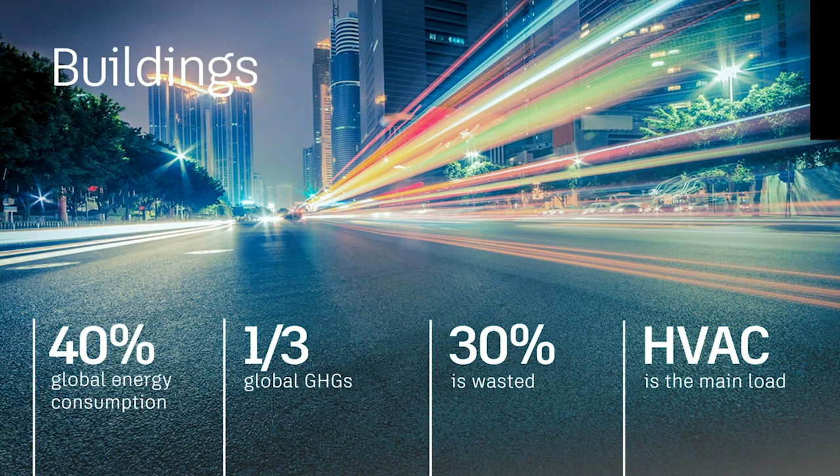overcome. For anyone who was at Autodesk University last year, our CEO, Andrew Anagnost, got up on stage and made sustainability fundamental to the core vision of Autodesk. We understand there's an inevitability of more. There's going to be more people, more products, more goods. At Autodesk, we want to enable designers and people who make things. It doesn't even have to be buildings. It could be a television or a product or something that you have in your house. We want to make that better by using less resources.

And when we start to think about our buildings, we want to look at massing. We want to look at the building form. We want to look at how it's oriented, how the sun plays on it, and the materials it's built from. And then the climate considerations. Where in the world are you building? How are things moving forward?

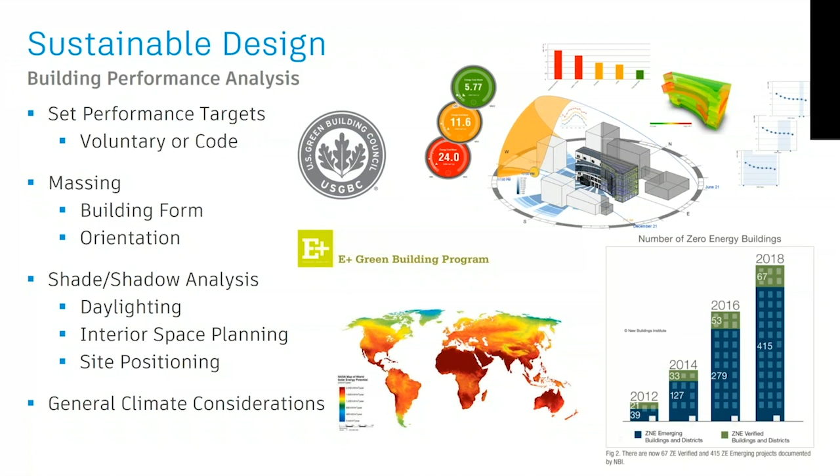With Autodesk Insight, it's a tool that allows you to take care of climate. So you can look at how the climate's affecting the building energy. You can look at your heating and cooling demands, and also solar and daylighting. If you want to move to some of the other things that are thought of as very important in building performance analysis, you can look at the Revit MEP tools and computational fluid dynamics, and then other plugins that go into Revit, such as Tally, which was developed by an architecture firm, KieranTimberlake, which allows you to do a life cycle cost analysis.

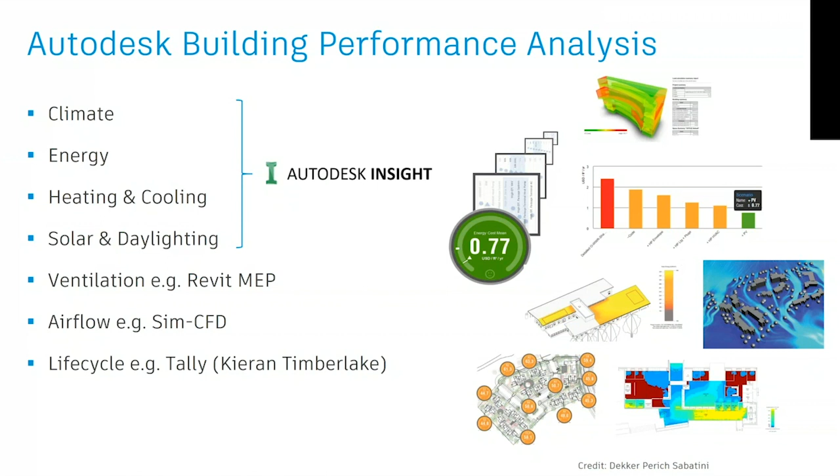So let's talk about one thing, and this came out Monday, I think Monday, September 11th, and it's hot off the press. I think this is really important, since this is an AIA certified webinar, to talk about some things that they just put in. They adopted new rules and ethical standards for members. And the three things that they added in were equity in the profession, sexual harassment, and sustainability. While not in the umbrella of this webinar, equity and sexual harassment are very key important topics, as we all know. But I really want to dive into some of the things they put in sustainability.

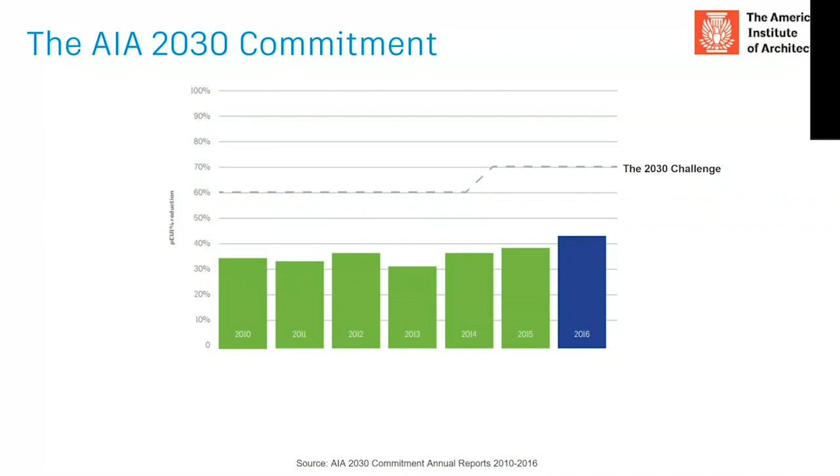Every year, the AIA produces a report, and one thing that is true every year is that energy modeling is key to meeting the 2030 challenge. But the sad fact is it's not being done on every project.

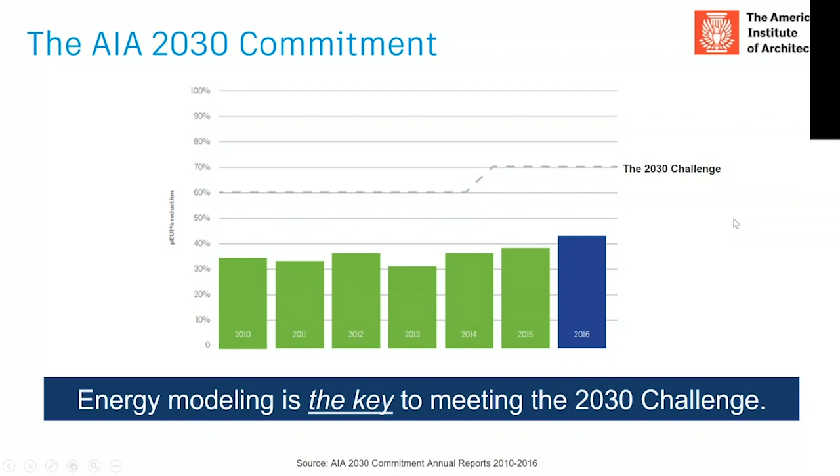But projects that are doing it are performing significantly better than projects that aren't. So really, when we think about things, we want to think about ways that we can perform energy modeling easier, with really nice, accurate results at early stages in the process all the way through the process.

So let's think about what energy simulation is. Energy modeling is a physics-based model that looks at the performance of the materials of the building that block heat transfer or cool transfer — the materials you use for your windows, the materials you use for your roof — and also the systems it takes to meet that design.

But we don't need to work in the dark anymore, not even if you're not a specialist. My background — I'm an architectural engineer. I spend a lot of time in the trenches doing very complex detailed energy modeling in eQuest and IES, doing computational fluid dynamic modeling.

But what's always the frustration to the architect is that the specialists take time. It takes time, and it gives you one point in your design, and we'll get to that. But that specialization doesn't allow for fast decisions in the iterative process that you as designers are doing with your clients very early in the process.

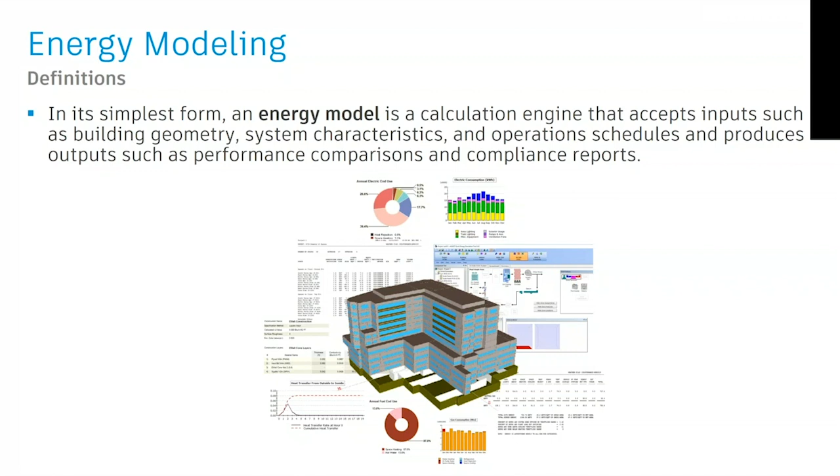Let's talk about the new design process. Here is the MacLeamy curve, very famous. Some of you may be familiar with it, but we'll walk through it really quickly. If we think about this black curve, the black bell curve, that's your traditional design process.

Preliminary design through your schematics, design development, construction documents are kind of at the peak of the bell, and then you go down. What you're seeing in the red line is as you move through the process, the cost of your design changes — it goes up through the process. But your ability to impact cost and performance goes down as you go through that process.

So if you make a decision as you're starting to mass and site your building down here, it doesn't have a high cost, but it has a major, major impact. But you see these cross kind of in that middle of construction documents.

So what we're hoping to do is evolve that black design process and shift it over to the side, so that you're making many more decisions early in the design process, getting really high impact at very low cost. And you see that you're almost through the game before you're even starting to gain cost.

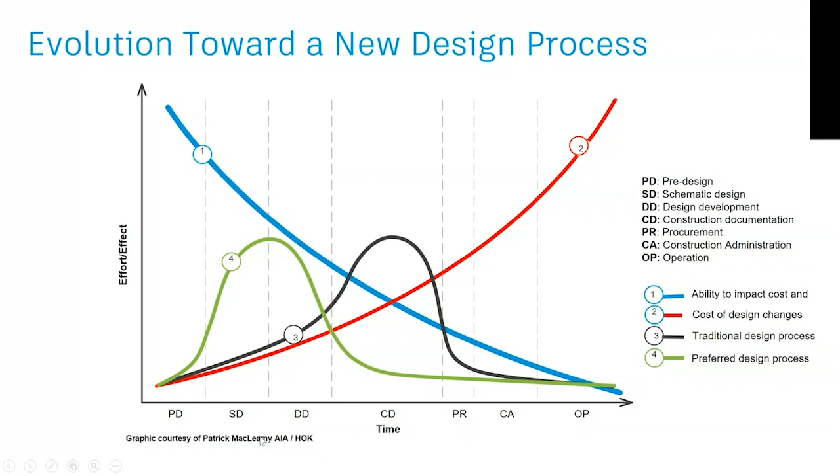So we're going to talk about a metric today, energy use intensity. It's thrown around a lot. People ask, what's the building's EUI? Let's make sure everyone understands what this is. This comes from the AIA Energy Modeling Guide.

Energy use intensity can be measured at the site, which is where the energy comes to your building, like the power line that comes to your meter, or at the source. Source EUI is all the resources it takes to create that power at the power plant, be it hydro, coal-fired, or solar, including embodied energy and transmission losses to get it to your building. So source numbers are generally higher than site numbers.

Energy use intensity is measured by taking the annual energy use over the whole year, at either a site or source measure, and dividing that by the total building area. So it's going to be in BTUs per square foot or kWh per meter squared.

If you want to dive into the data this is pulled from, especially for a non-typical project, there's a survey—the Commercial Buildings Energy Consumption Survey—and I'll share links at the end. If you ever hear people say CBECS, that's where this data comes from, the database used to set these targets.

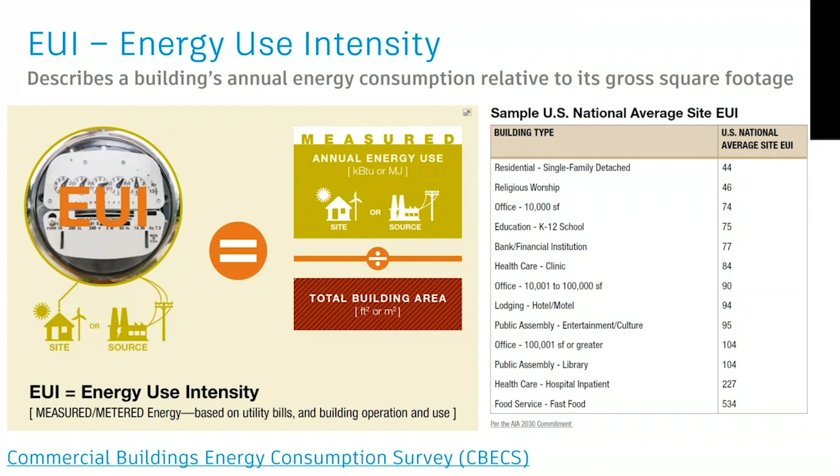Then they're thinking about the window to wall ratio. This is going to have a beautiful view—I'm looking out my window at the Berkeley Hills—so it's going to have a beautiful view of the hills.

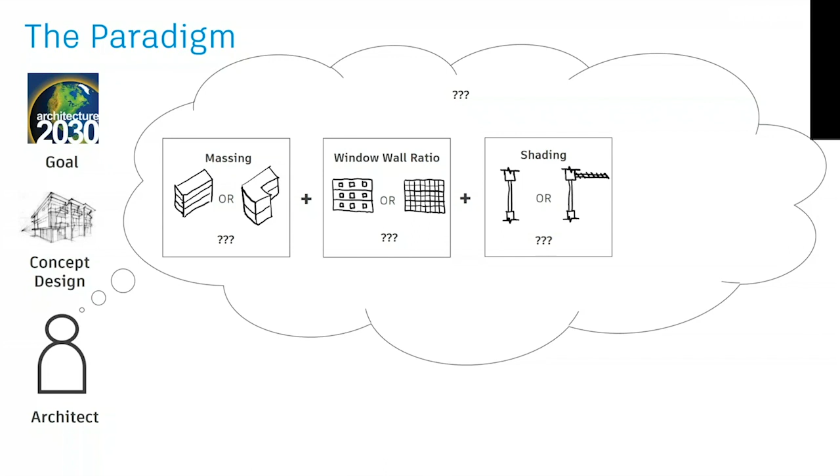Is it going to have shading? For occupant comfort and glare, do we need shading that makes the building perform better, keeping that direct beam sunlight from becoming a heat load, but still letting in that great light?

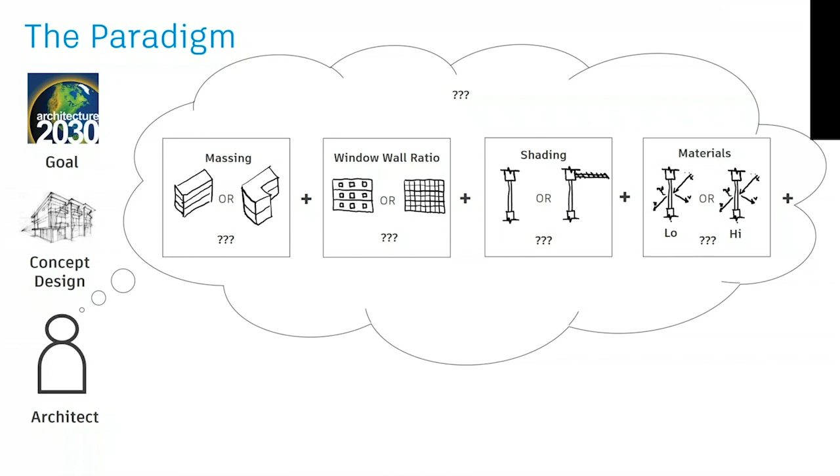What materials are we going to use? Are we going to spend a lot on glazing because energy is very expensive here? Are we going to want operable windows, and how are we going to do that? When you think about this, it's a very iterative process—interdependent and progressive.

But here's where it gets complicated. In addition to the architect, you have the engineer, your engineering partner. They're looking at your building and asking: are we going to use LED lighting? What's the best system for this building? Do we have room for a mechanical room? Are we going to incorporate any renewable energies?

And countless other decisions. But then you have the owner with their own set of criteria. They're thinking about comfort, maintenance, and cost—we all know they're thinking about cost—and what the occupancy of the building is, how it's going to be used.

This is the whole design, use, make process, and it's all in there. We're all iterating over these many things. And how do we know in that what is right?

Is it the energy code? Are we using manufacturer's data, rules of thumb, or historical data? There are all these different things that we're using.

We can also use, at this point, an energy modeling simulation. It gives you the idea that if we design the building this way, use these materials, and use these window to wall ratios, this is what our energy use should be. It's very precise, and it does look at the whole system.

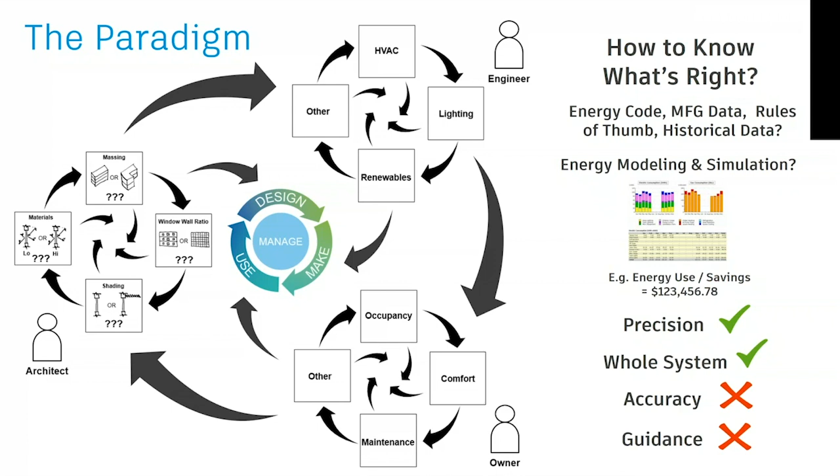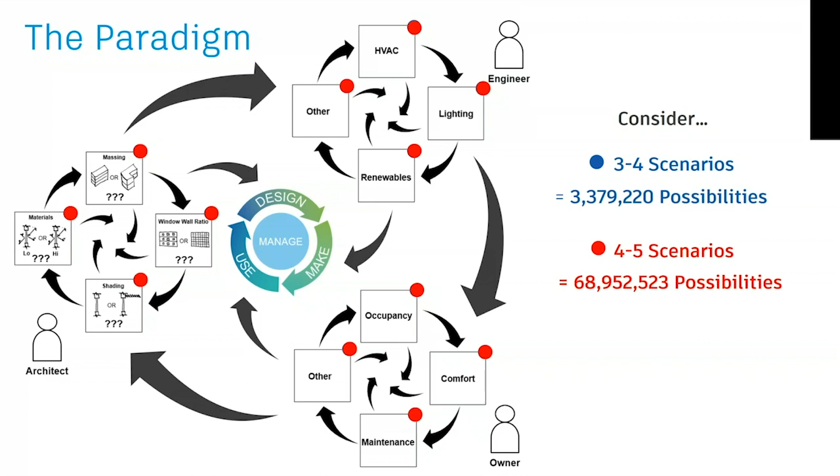But it lacks accuracy and guidance because we're really looking at a single point, a single model, to make some of those decisions. Yet each of the players in the design-use-make space has about 3 to 4 scenarios—that's about 3 million possibilities. If they up that to 4 to 5 scenarios, we're now at 68 million possibilities. So if we do even 100 different model simulations, or thousands, how are we going to get there?

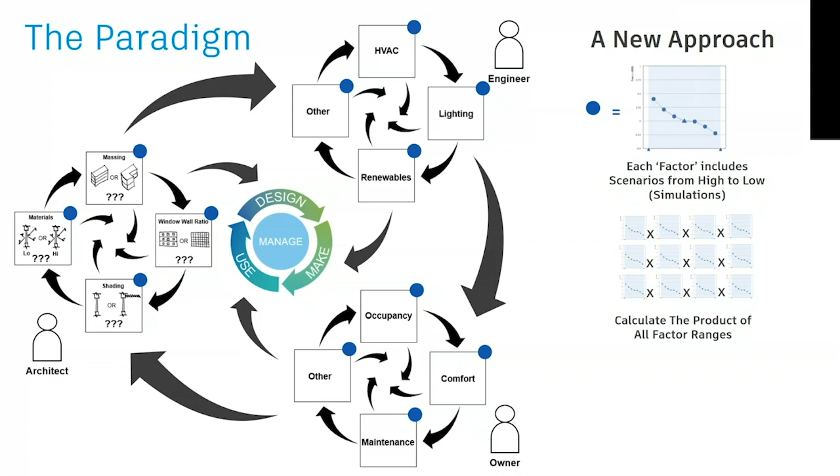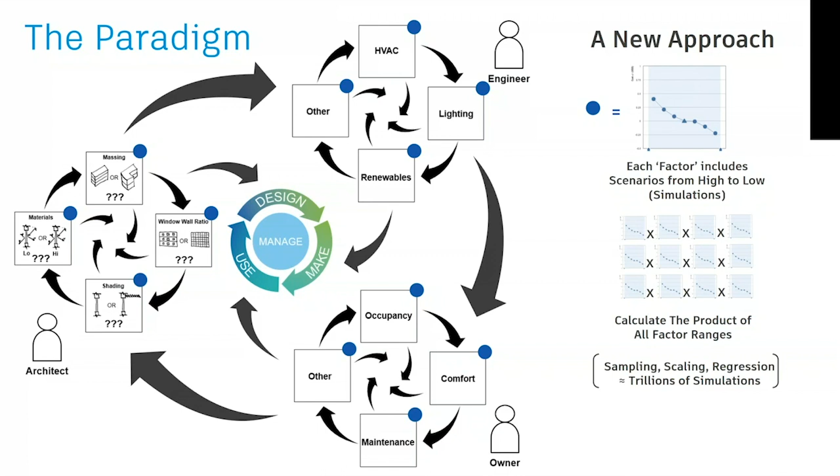Well, we want to look at a new approach. We want to start thinking, let's embrace that uncertainty and have the range that's available. We can have a range from high performance to low performance in a series of simulations. We run a number of simulations taking that into account and do a product factor across all of those, doing some regression and sampling and scaling. So essentially we're able to take, by doing a number of simulations, creating trillions and trillions of options that you can then control with a slider to get an energy range.

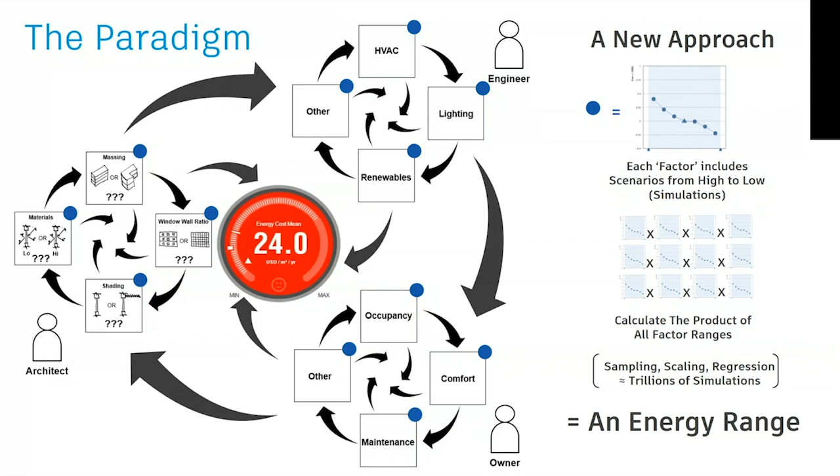That energy range says, well, we're not really sure what we're doing as far as materials today, but if we keep it open, if we embrace that uncertainty, we know it's going to be within this range. And so for each factor, be it your glazing, be it your window to wall ratio, be it your roof construction, your wall construction, your building orientation, potential for renewables on the roof, you get a range.

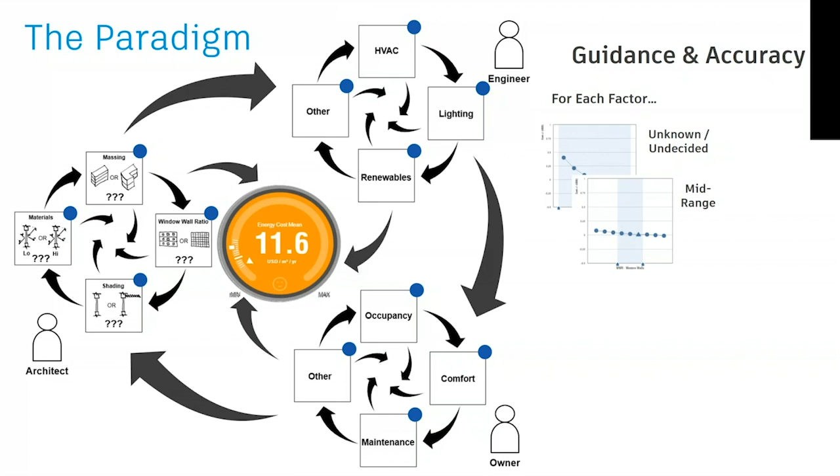You can keep that very, very wide open. You can keep that unknown. You can keep that undecided. You can cut that down into a mid-range. We know that the budget on this project is going to let us at least hit industry standard, or if not better. Or we know that this is a budget project and it's not really pursuing any aggressive codes. Anything aggressive, we're going to keep it at code minimum. So you might need to know that that's where you're going to be going with a factor in your building.

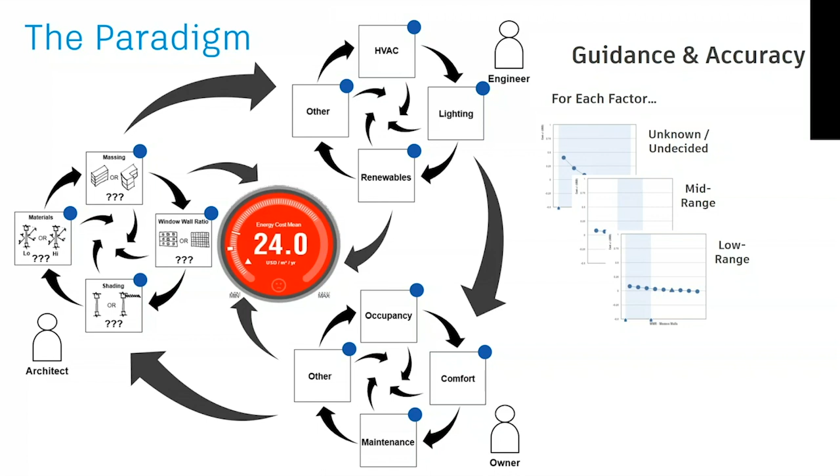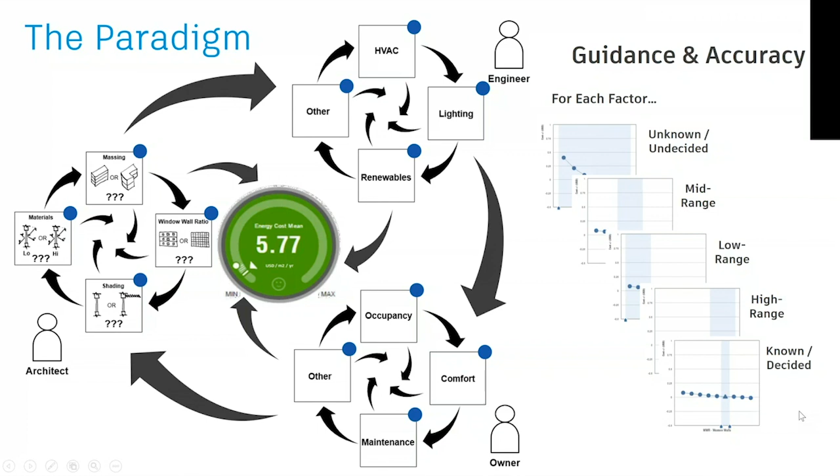Or you can say, this is pushing the envelope, we're going for net zero. We are tightening all the screws and we're going to sail this ship to winning. And then once you've known or picked something, let's say you know you're going to use a certain type of curtain wall, you move it to the triangle and you can lock that in. Now it eliminates the range and you know what that one very sound performance will be once you start to lock that in. And that's essentially what we're going to talk about.

We're going to talk about Autodesk Insight, which is a plugin for Revit, part of the AEC collection. And what it allows you to do is to take models from any stage in the design, from very, very simple massing. You can take the massing shapes and start to get some actionable insights. You can start to get more detailed and move in there and lock in some certain things that you've already had discussions with the owner, and really look at how those energy ranges go.

So you can see there's a similarity across that design process that you're seeing. It's not like even early when you're doing those early massing, you're not that far off from how it gets as you get detailed. So that's one thing that really lends to the accuracy of it.

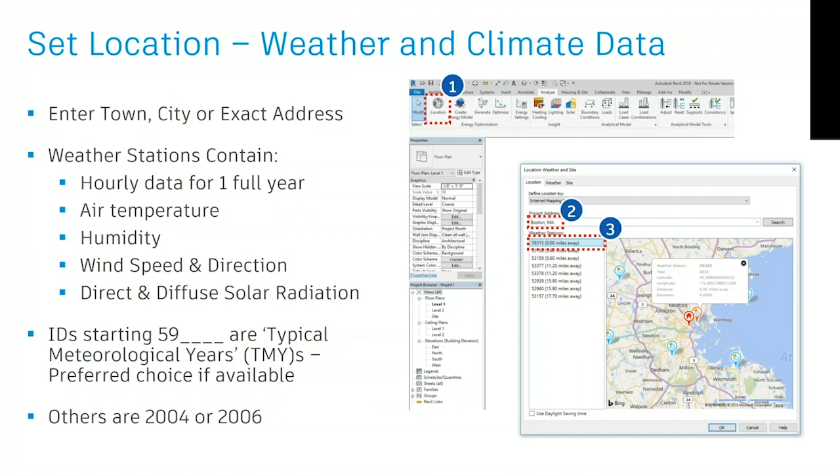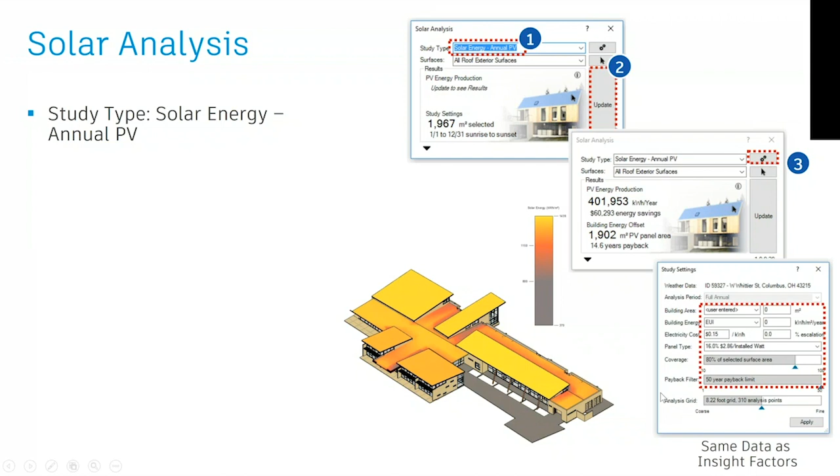And what you see is that peak is different. So always remember when you're running studies, it's important to think about, if you're picking a day, checking some days around it and making sure that you didn't get a day that fell out and is simulated as a cloudy day. Some days are cloudy, some days are sunny.

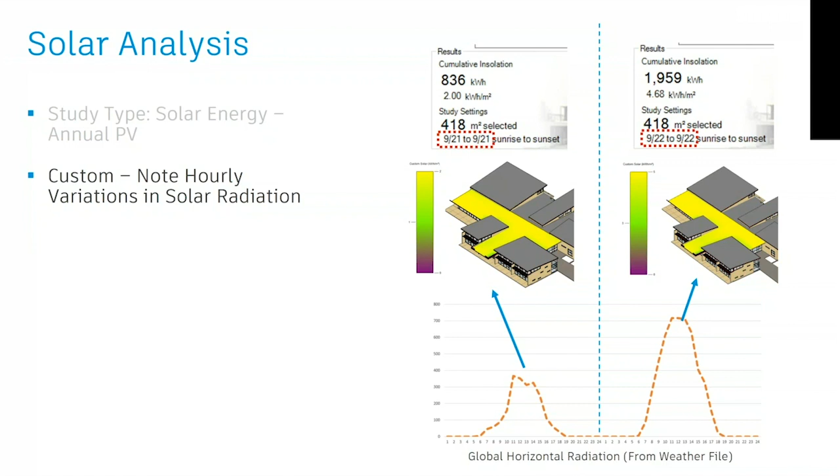So it's really important—that's why a lot of times we want to look at an annual study. But that shows that in that weather file, the typical meteorological year has some variation and some flexibility. You can pick whatever you want.

Roofs, for example, when we just picked that, you would go in, you'd pick up whatever surfaces you'd want to click. They will go into an opaque state, and then you click finish up in your window bar, and that will select that surface.

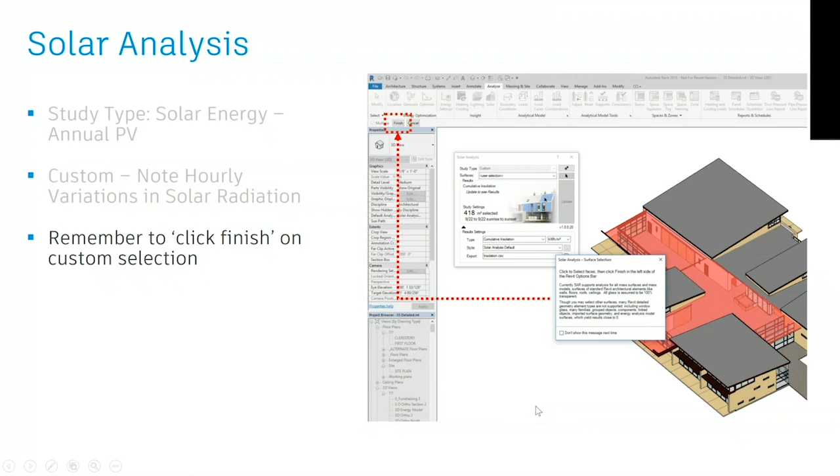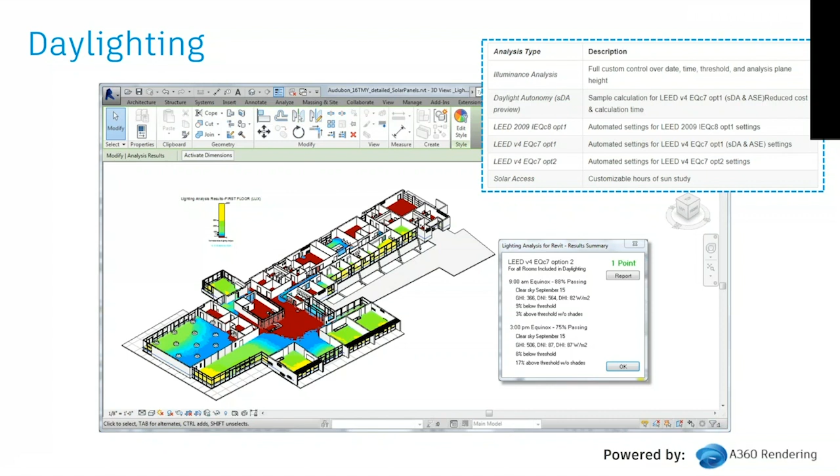I'm not going to dwell on the daylighting. I have a lot of resources that I'm providing you for it, but there is the ability to do very robust daylighting analysis in there. All of the different tools for LEED v4, option 1 and 2, are in there. Also customizable studies—if you want to see solar access in a site, you want to look at illuminance or daylight autonomy, looking at those foot candles and how they would fall into a space.

This gives you the daylight autonomy. You can export that by rooms into a schedule. And then you can also look at ASE, or annual sunlight exposure, in the daylighting workflows.

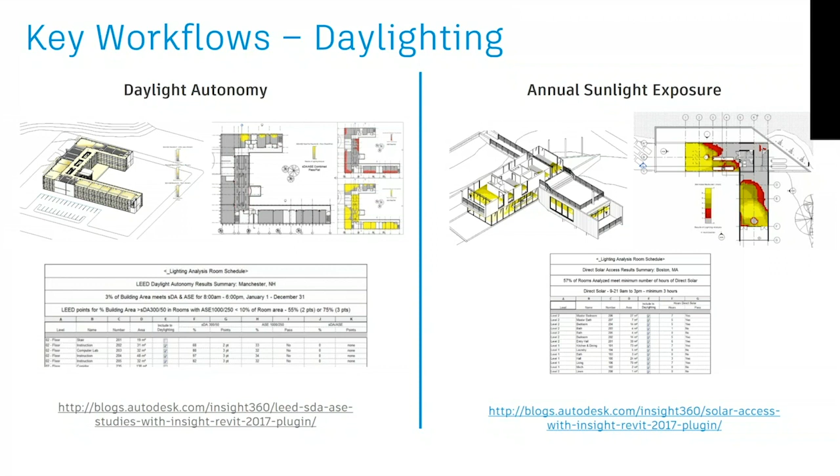This is one part, so I'm just going to make a statement here, so we know that as we move to the next slide. The daylighting studies are free up to a certain threshold. They're run in the cloud, and if you go beyond, if you're doing, I believe, more than 7,500 square feet, they do start to consume a bit of a cloud credit that you would need to purchase separately to enable future studies. We can provide more of that detail if that's of interest later.

Any of the energy studies, any of the solar studies, you can run them till the cows come home, and there's no cost to you. That's a free tool that's included with Revit and the AEC collection.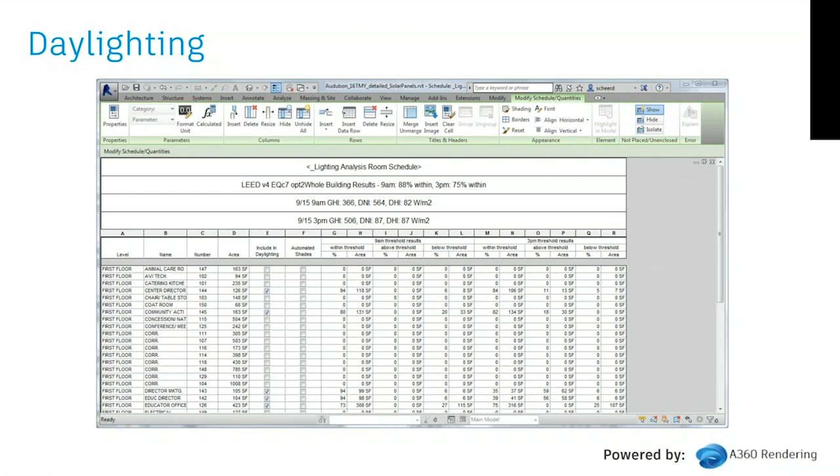And in this is just some of the lighting references in the back. It gives you... since daylighting analysis is a little bit more customized than energy analysis, you really need to dive into that. We've put together a ton of best practices and resources that will be provided to you following the webinar to go deeper into that.

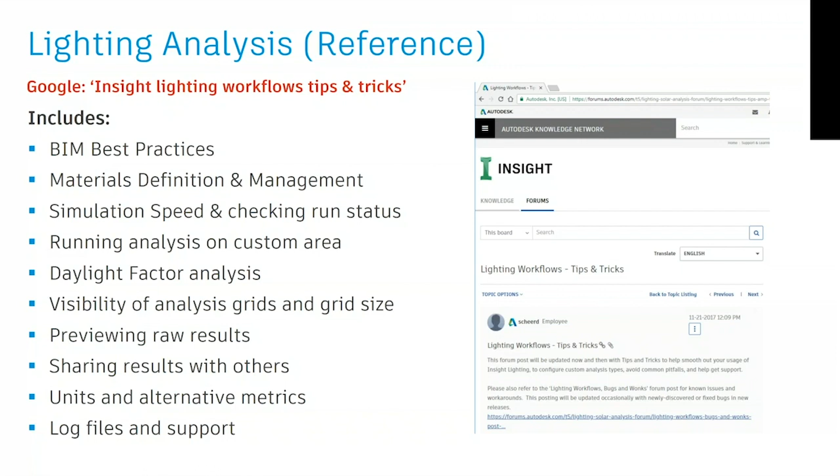So let's look at when we're doing the energy optimization, the Revit energy settings. You'll click on the settings, and I want this to serve as a guide for trying this on a project. You'll open up the energy settings, and this is the workflow.

So you're going to always want to use conceptual masses and building elements. Why? This allows you to take into account any shading elements when the algorithm creates the GBXML model from that. If you have any context buildings outside that you've modeled as shapes, say there's a big tall building next to this that's going to be blocking the sun, you need to have that incorporated. That's one of the reasons we want to use that.

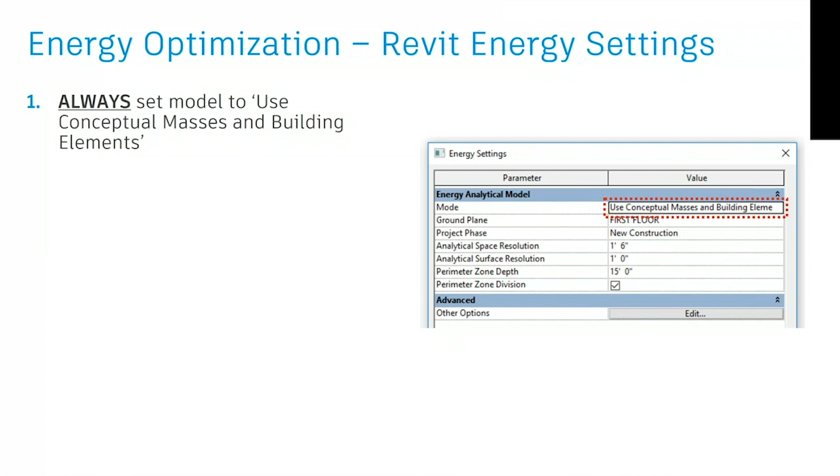This is the analytical space and surface resolution. One of the powerful things about this tool is you do not have to have a watertight model that you can drop in a bathtub with no leaking. You can have some surface gaps and some space gaps—it doesn't need to be perfect. You can draw a box and run analysis on it. So we always recommend to start with the default analytical space and surface resolution and refine as needed.

Perimeter zone depth: we recommend if there's no walls, if it's just a mass model with mass floors, put about a 15-foot perimeter zone that zones the model out, so the east and west facades are being looked at differently than the north and south facades. But if you're detailed and you have rooms and windows already there, we don't recommend setting that, because that zoning work has already been done. If you're unsure, it doesn't hurt to zone, but best practices are as we mentioned.

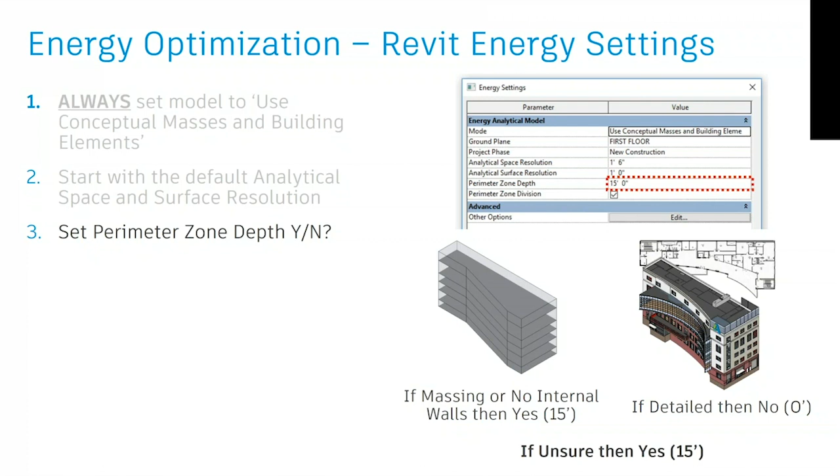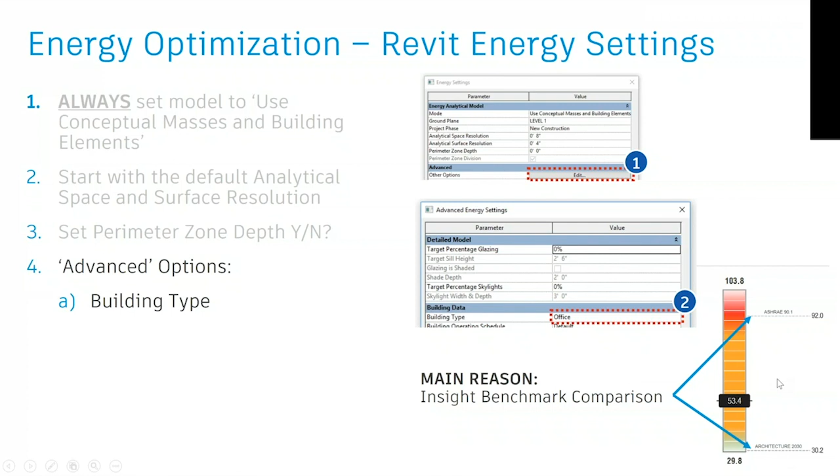There are some advanced options. You can pick a building type, and what this does is go into those benchmarks and CBECS data, saying they're building multifamily housing, an office, or a factory. This gives us the typical schedules you're going to need, what the energy use intensity should be for code by an ASHRAE standard, and what reduction you're shooting for if you're going AIA or Architecture 2030.

Room and space data: you don't need to have rooms or spaces in the model, but let's say you're putting a very big data center in the basement of an office building. You might want to load that up and give it mechanical properties, because we do take into account the energy, the kWh load of that.

Or let's say you're doing a healthcare project and you know it's going to be a radiological facility with a ton of MRIs—you just know that from the beginning. You might want to take that into account before talking about energy use intensity, because otherwise, if you're talking to clients without accounting for that equipment, later when usage jumps drastically, they'll say 'you told me it was 40 and now it's 130'—and that's just because of equipment load.

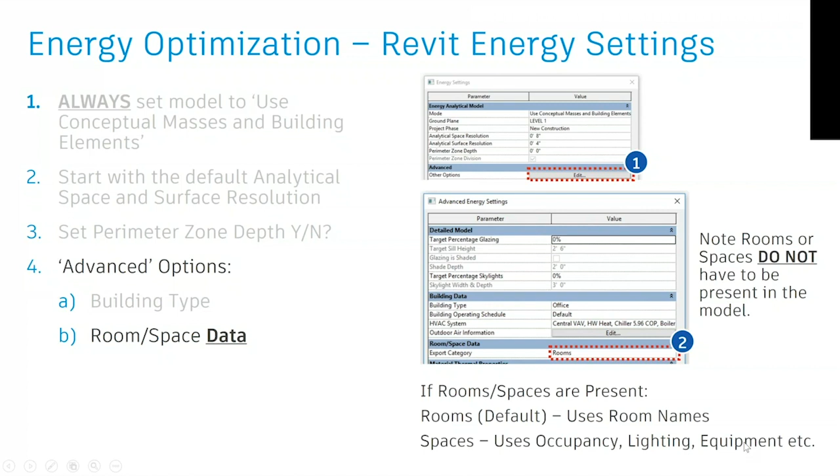So spaces are where you can assign extra occupancy, lighting, equipment loads, etc. We always recommend disabling the detailed element material thermal properties, especially when you're just getting started and nothing's dialed in. A lot of times people use wall types that might be too thick or thermally inaccurate, and we don't want to introduce that level of error. It's best to let the algorithm show you how a building can perform in range, rather than garbage in, garbage out—that's the whole theory.

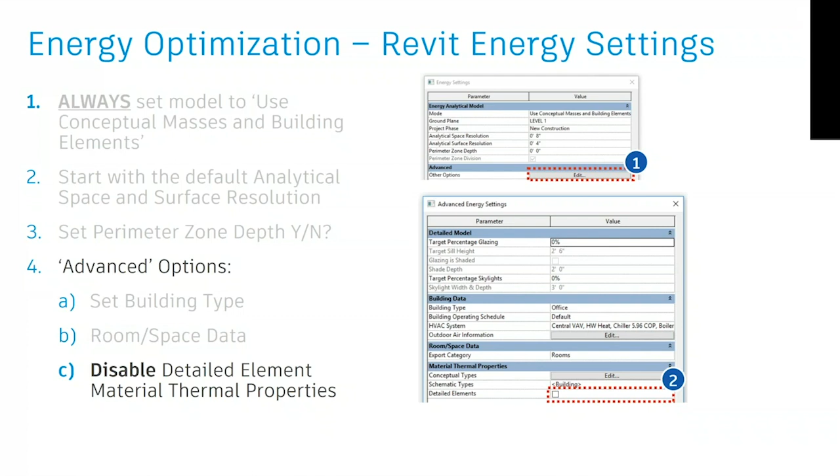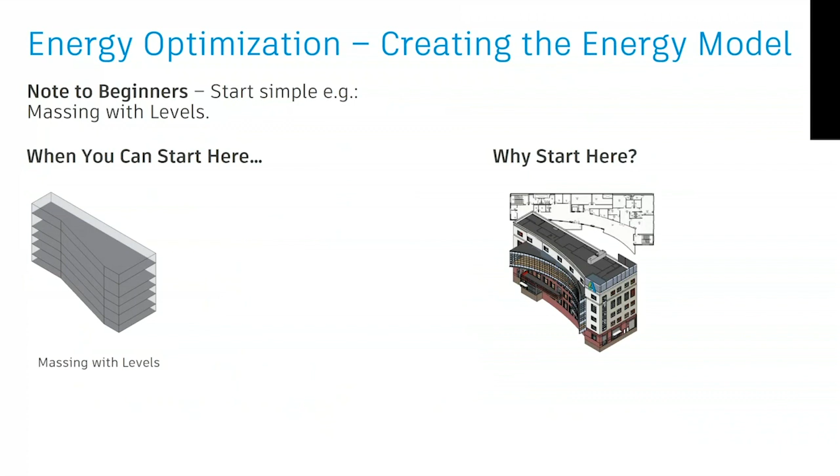So when we create the model, why would we want to start a model in a detailed space when we can start there? We already showed earlier that you're not that far off in running it on a mass and running it on a detailed model. So you can make the massing with levels, you can do some automatic perimeter core zoning and glazing, and you can get some very fast, accurate learning from there.

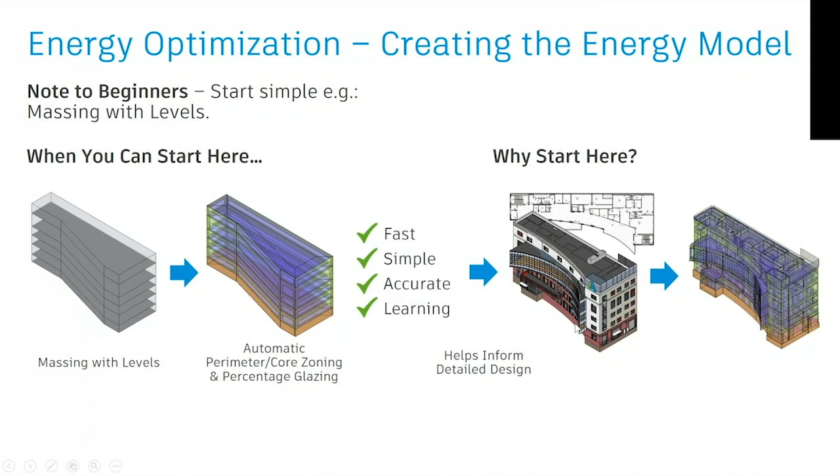You can see those things. And that helps you to inform this detailed design. And then you can run that later and see what the impacts of putting in the shading are, what the impacts are of having this outward atria space up at the top where it has a ton of glass.

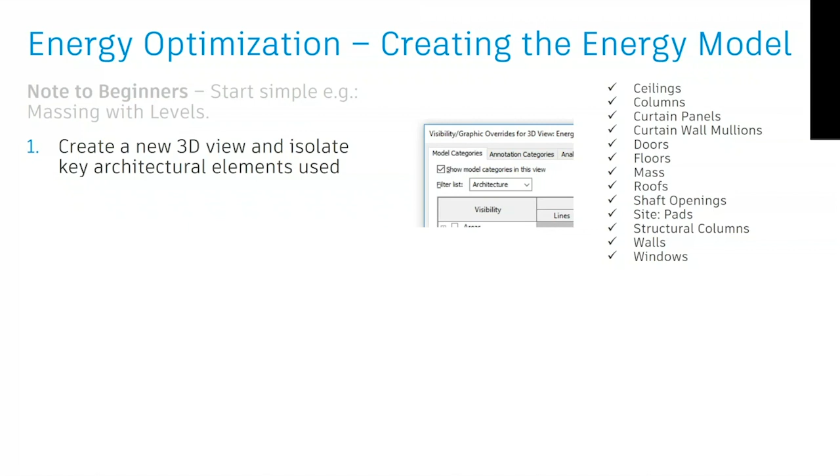So in order to set the model, we recommend creating a 3D view and then isolating the key architectural elements used. That's going to be what's important to run the physics on for the energy modeling. And you see in that list, it's the ceilings, columns, et cetera, all the way to walls and windows. So when you look at this, we recommend you look at things like this building pad down here that's not really going to play anything in the modeling, and you want to set that to non-bounding, because what that does is it cuts your space.

Because the processing time is proportional, it's cubic. We create a cubic voxel model to do this. It's times to the third power. So if the red box is 10 and you cut it in half, 2 to the third is 8 times faster to run the model when you cut your space.

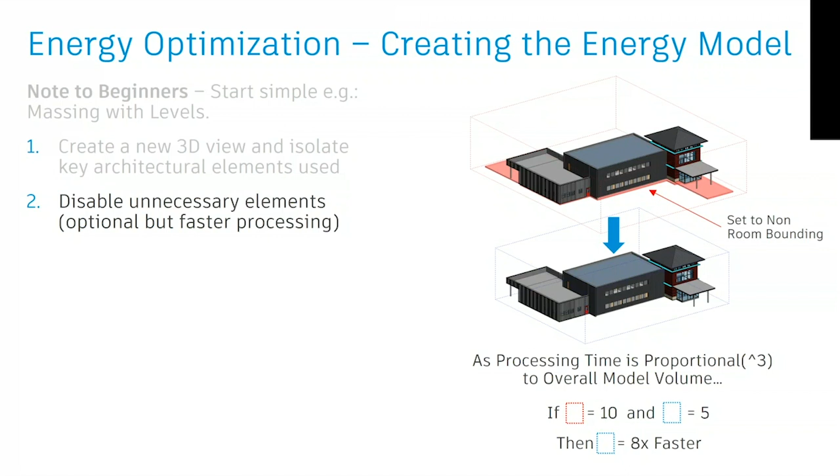What you want to do, I talked about the analytical surface and the analytical spaces. You want to just take a quick look. If you see, oh, someone just didn't connect that roof together, or we need to pop that wall up, it's good to fix it right there before you create the model. If they're really big, let's say our analytical space resolution was 12 inches, anything over 12 inches is not going to be good for the algorithm. Small gaps that are beneath that resolution are fine.

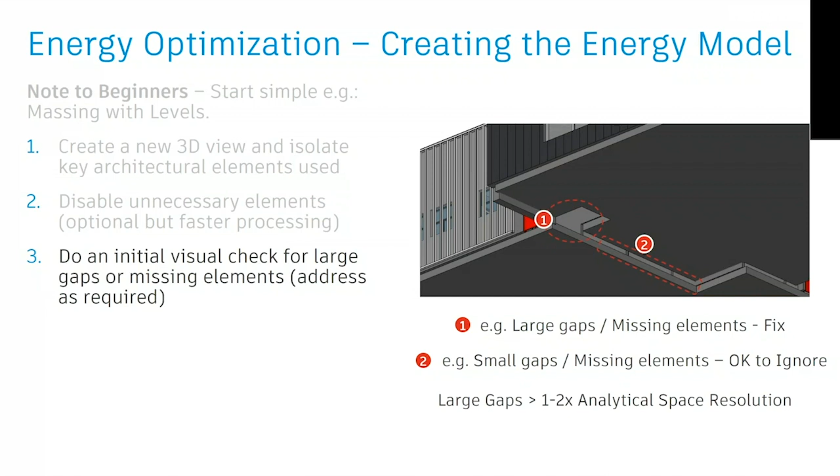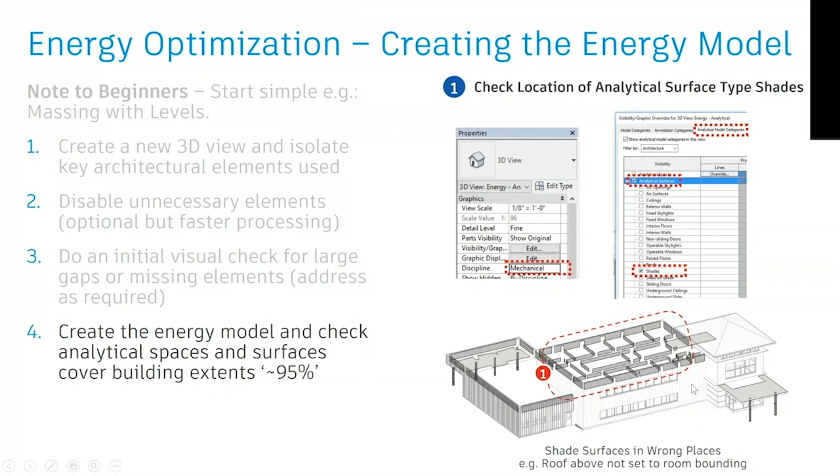What you're going to do then is click create the energy model, and then in the analytical surface, you can turn everything off. So here what we're going to look at is shade surfaces. And you see there's a lot of shade surfaces, and what happened is these are actually walls that weren't set to room bounding. So if we go back and set those to room bounding, and then look at different things, exterior walls and fixed windows, you can see there's also some walls missing here. So there's obviously some gap.

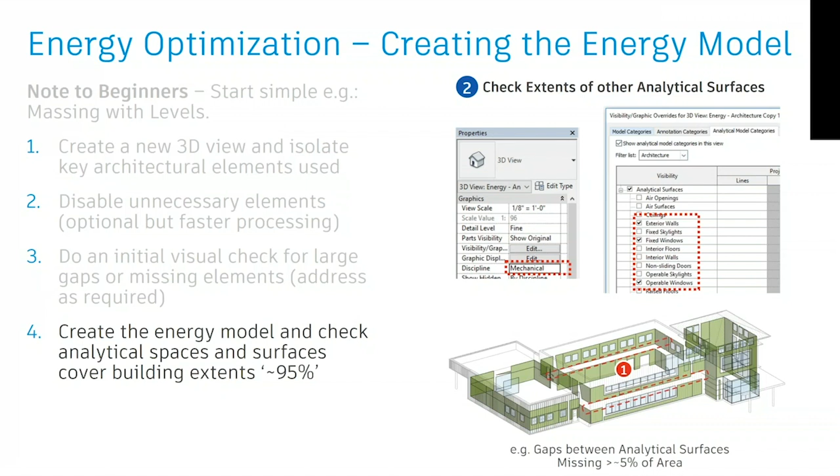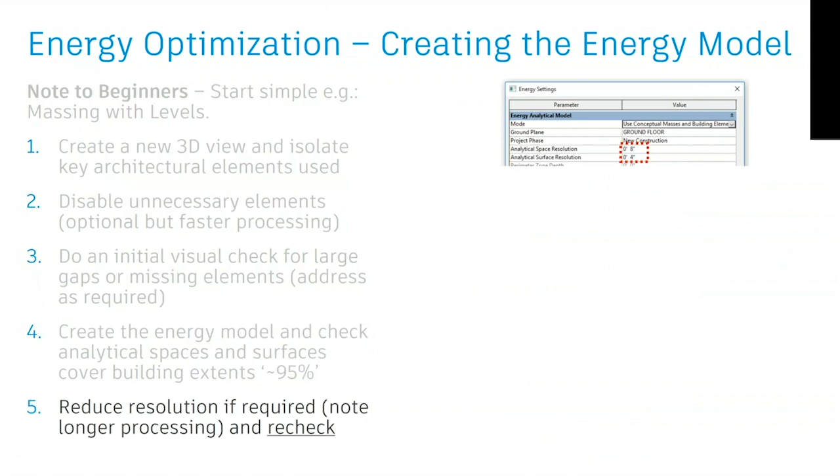You can go in and either change your surface resolution, or you can find where that big gap is. And it's a significant area, so you do want to fix that. So you can reduce the resolution and recheck the model. So here we cut it from 18 inches to 8 and 4 rather than 18 and 12. You see, by tightening that up, now we've tightened those walls down in there. We're starting to make a much more robust model.

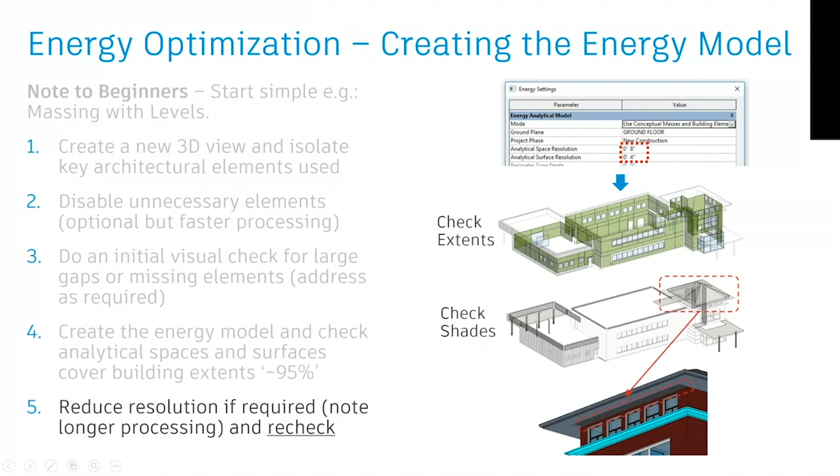We check the shades again. We set those to room bounding. Those walls are no longer acting as shades. But we do see that there's some issues over here in this little tower. When we look, there's that big gap where the roof is not connecting in. Good to pop that in, rerun it again. Now you see the shades are where the shades need to be, the windows are where the windows need to be, and the walls are where the walls need to be. And this is your energy analytical model. This is what we will export via gbXML to eQuest to run your simulations on.

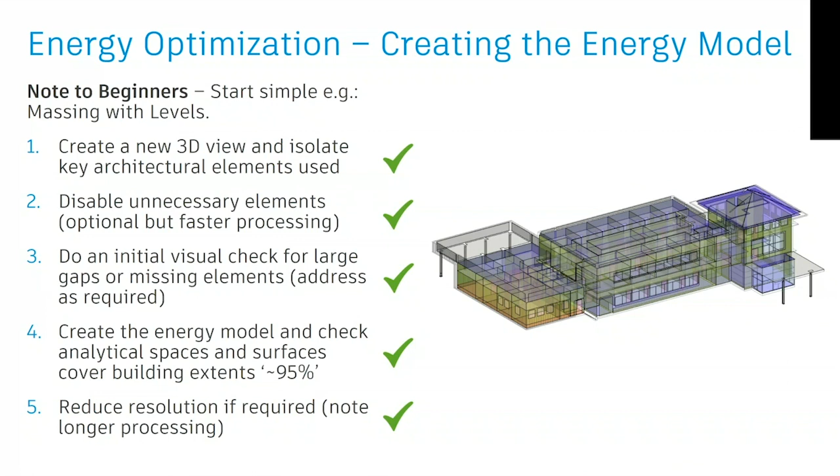So we've created the model and we sent it up to the cloud. Now it's in the cloud. You'll get an email saying your model's been received. We're running simulations on it. And then you'll get an email that says, your model's done. Please click here to go into Insight.

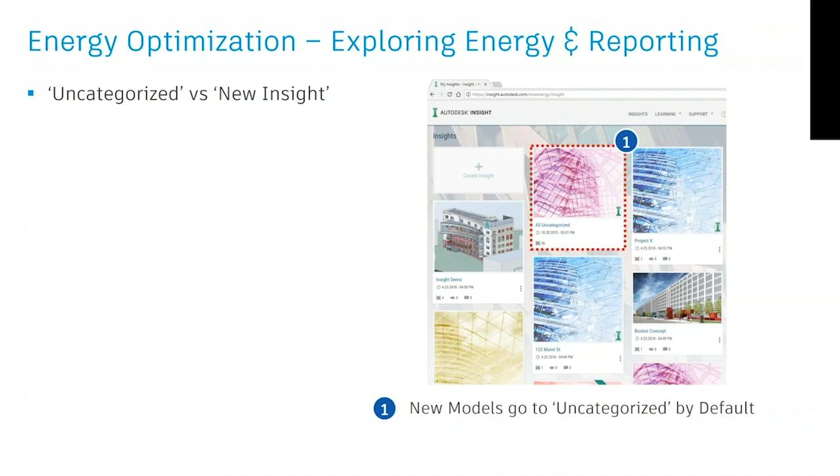When you go to insight.autodesk.com and log in, everything's going to be put into this bucket right here, uncategorized. A new model by default goes into uncategorized. What you're going to want to do, let's call it Project X, because it's a secret project. We're going to want to create an Insight project, call it Project X.

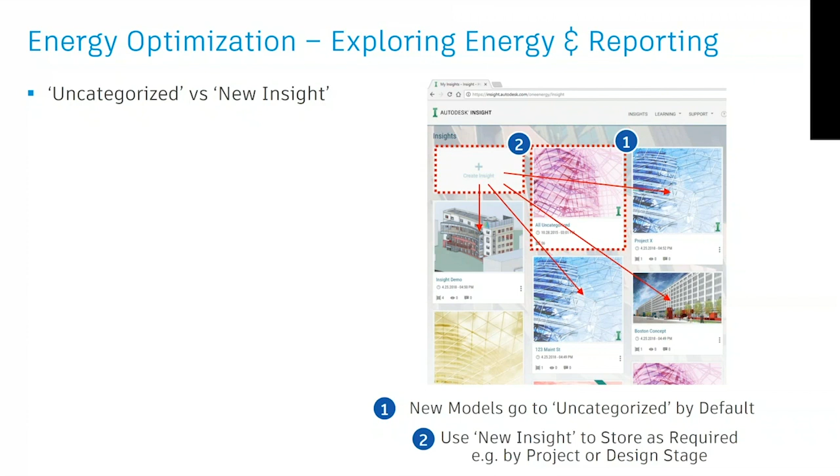And then you have Project X over there. You open your uncategorized, you go in the three little hamburger dots here, you hit move, and it asks you where you want to move it to. We want to move it to Project X.

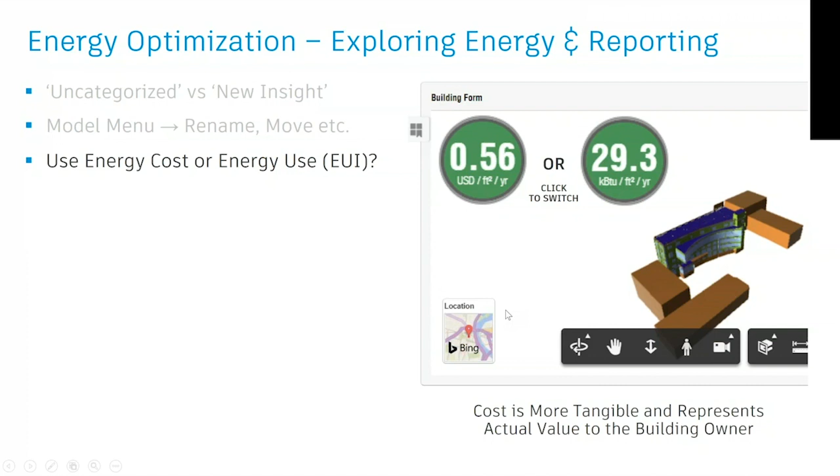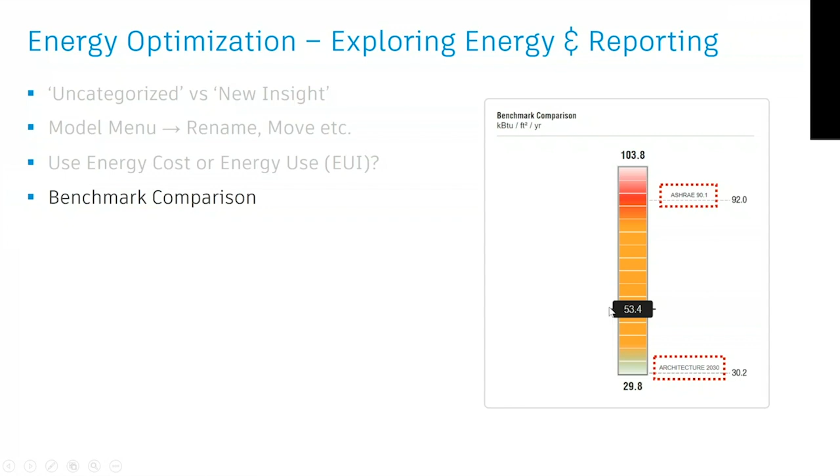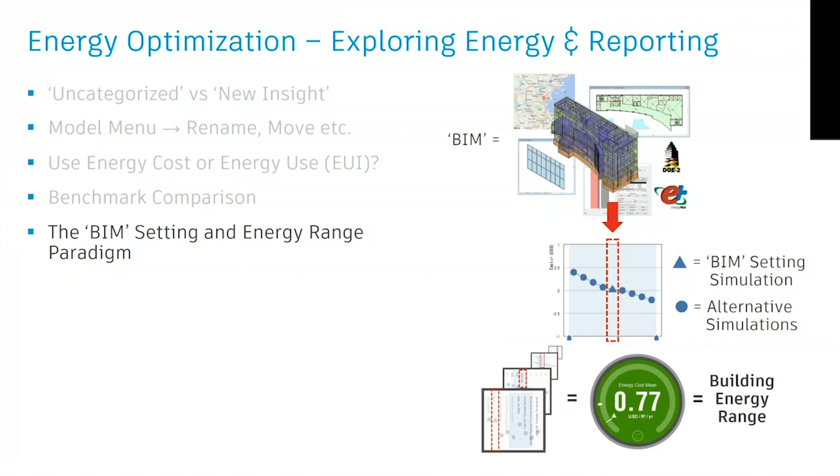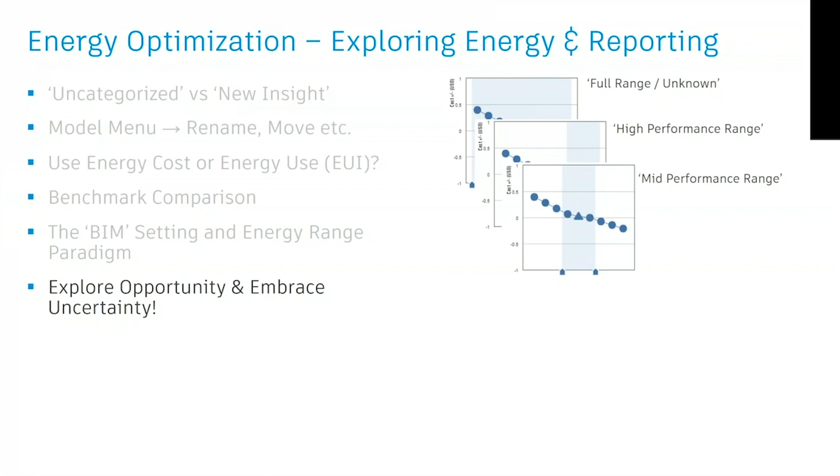What we encourage people to do at this point is explore that opportunity, embrace the uncertainty. If you have no idea what the HVAC system is going to be, you haven't even solicited bids for a mechanical engineer, leave the systems in the full range unknown, and then as you start to have those conversations, you can tighten them up. As I said, if it's a very aggressive building, you might want to think about what the high performance range would look like, a mid performance or low performance.

Ultimately, that BIM setting. Or there's another single point. You say, we're really going to drive our plug loads in this building down here. It's going to be something that's really important. If you take that other single point, for example, in a construction material, go back to your BIM model and change the wall type to that. So let's say you had modeled it with just a very standard CMU block, but then you said, I want to have more insulation on it. And you go back into the model and change that and rerun the simulation. That other single point would then become your new BIM when you ran it through.

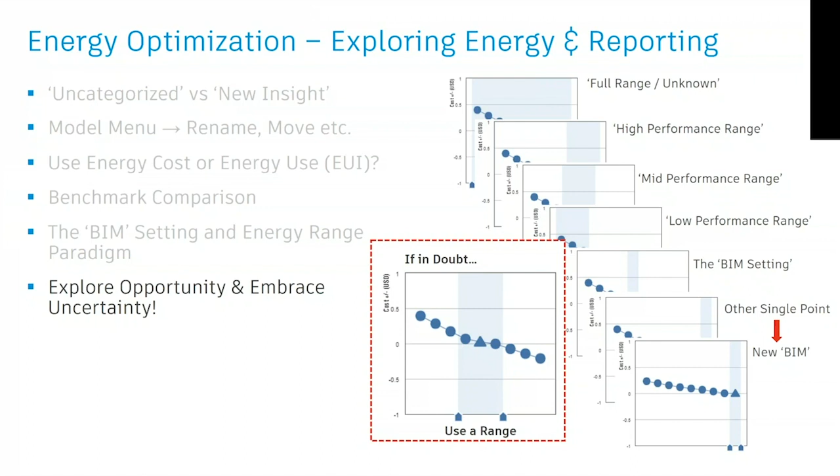This is important to mention now. Any changes you make in the web instance of Insight, where you're learning and understanding your building, do not talk back to the model. If you think about it, if you want to have someone running an analysis, you don't want them hurting the design as they move forward, because you can be working out of the same model.

You can set up scenarios, a saved combination of settings. So let's say you're in New York City and you have the really aggressive New York City building code. So you can set up a setting of New York City building codes where when you push that button, it'll change everything to at least that code minimum.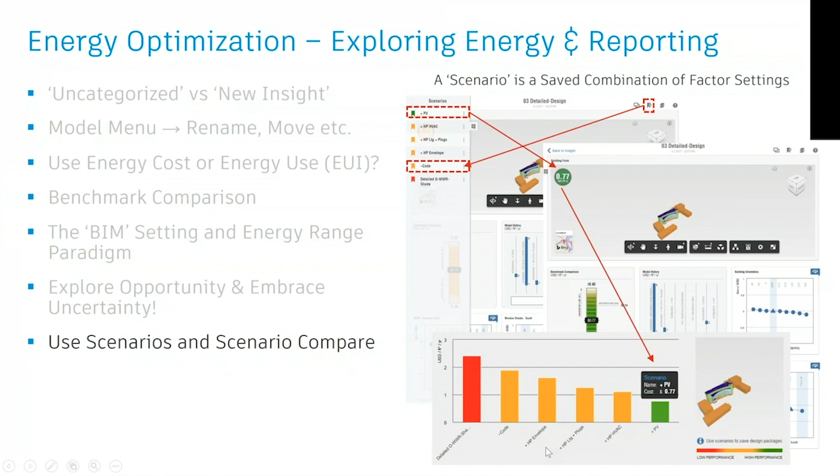So this is important when you want to march down. This is where we started. This is the code building. We did some work on the envelope. We added lighting and plug loads. And then we thought about the systems, and we talked to our engineering partner, and then added photovoltaics. And that's that very classic march down that you see all the time when you're talking about these different things.

You want to use that model compare in settings. You can also look at that model, how it's gone along the way from schematic to detailed, and those are kind of energy bars. It gives you a bar chart so you can see how that was going. You can share this. Over in the little dial, you can set your unit, your currency, if you know the utility rates, how it's going to be sorted.

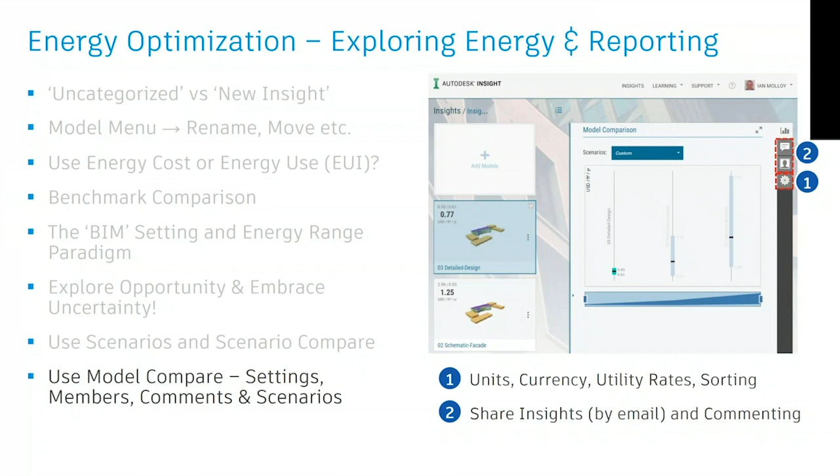You can share these insights, so you can send this to another team member. You can send it over to your mechanical team. You can share it with them and ask for comments on what system to use. That's just a very simple internal chat comment function that happens in there. And then you can apply those scenarios to the models.

This is one of the greatest things I think that Autodesk did with the AIA 2030 commitment. We were very instrumental in helping to fund the DDX, the Design Data Exchange, so that you could just take the data, and instead of running a spreadsheet or filling out all of this, go over, click again in the little 3 hamburger dots, and click Export Report to the AIA DDX. This enables you to have the work in the schematic design, click Report to DDX.

Excuse me, I'm gonna sneeze.

Sorry about that. You'll report to the AIA DDX, and that will take your project right in, the project name, where it's performing, and all those general details will be pre-populated for you to save right into the DDX. It makes reporting your project as simple as a click of a button, which is always what we want to do and how we want to think.

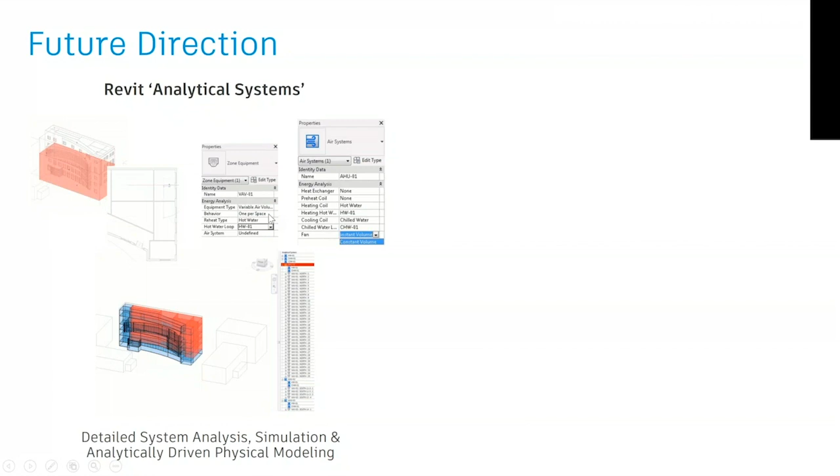So let's say we know we're going to zone this and we're going to put this on a certain type of system. And throughout the building, then assigning, for example, a VAV system, putting in your hot water and your chilled water and your cold water loops, putting in your different coils and all of that data. And then the development that we're moving towards is being able to take this out into OpenStudio and really dialing in. Do we want to put an underfloor air system in here? Do we want to look at chilled beams? Do we want to run some parametric simulations on the impacts of that?

OpenStudio runs on EnergyPlus, and we're going to be able to then put in very, very detailed systems. We're going to be able to say, this is what it would look like with an underfloor system. This is what it would look like with an overhead VAV system. And that's the coming soon. So right now we have the tool for the architects to make their early decisions, and what we are pushing towards is to have the engineers be able to make much more detailed analytical systems in the same tool.